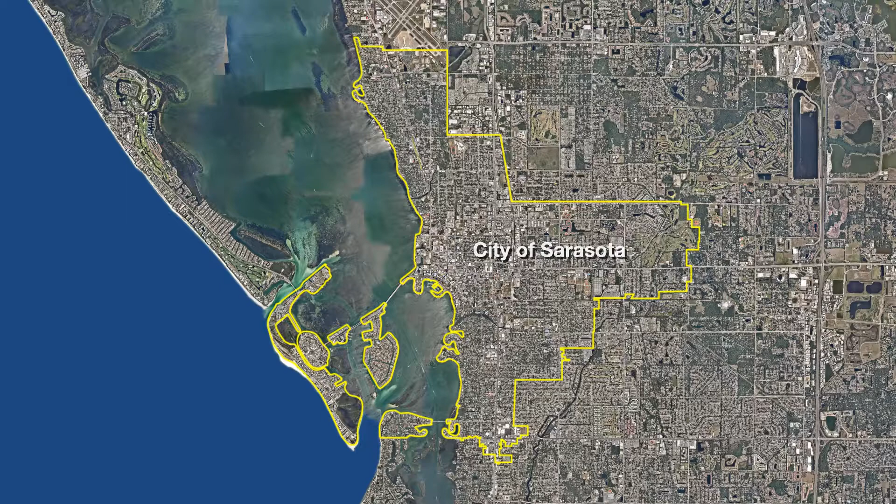Welcome to the public information meeting for the US 41 at Dr. Martin Luther King Jr. Way and Myrtle Street intersections Project Development and Environment, or PD&E, study. The Florida Department of Transportation, District 1, in cooperation with the FDOT Office of Environmental Management, the Sarasota Manatee Metropolitan Planning Organization, the City of Sarasota, and Sarasota County is holding this meeting to provide you with information and to obtain your comments about the proposed intersection improvements to and between the intersections of US 41 at Dr. Martin Luther King Jr. Way and Myrtle Street. The length of the project is approximately half a mile.

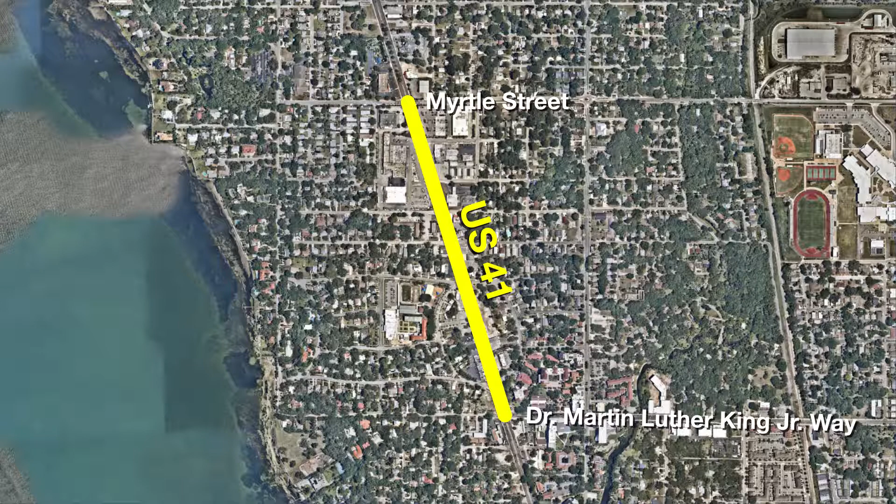The environmental review, consultation, and other actions required by applicable federal environmental laws for this project are being or have been carried out by the FDOT pursuant to 23 U.S.C. subsection 327 and a Memorandum of Understanding dated December 14, 2016, executed by the Federal Highway Administration and FDOT.

The objective of this PD&E study is to evaluate and document the engineering and environmental issues associated with the proposed improvements along US 41 and at the intersections of Dr. Martin Luther King Jr. Way and Myrtle Street, and then select a recommended alternative based upon that analysis. The purpose of this project is to enhance safety, non-motorized connectivity and access, as well as vehicular traffic flow and operations between residences and schools of the northern downtown Sarasota area and the Bayfront area.

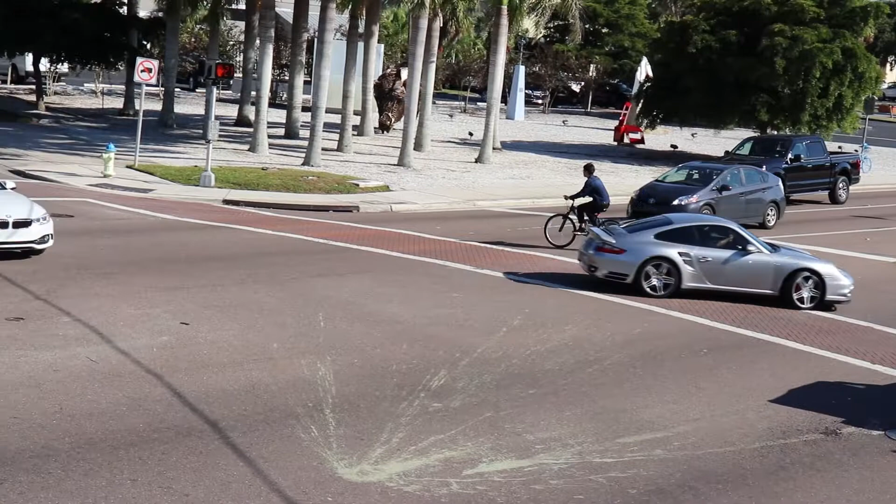The proposed improvements are similar to improvements that have been identified at other intersections along US 41 that are intended to improve traffic flow and enhance safety. The US 41 intersection improvements have been identified in the 2030 Sarasota City Plan, also known as the Comprehensive Plan. It is also included as part of the Sarasota Manatee 2040 Long-Range Transportation Plan and Transportation Improvement Program.

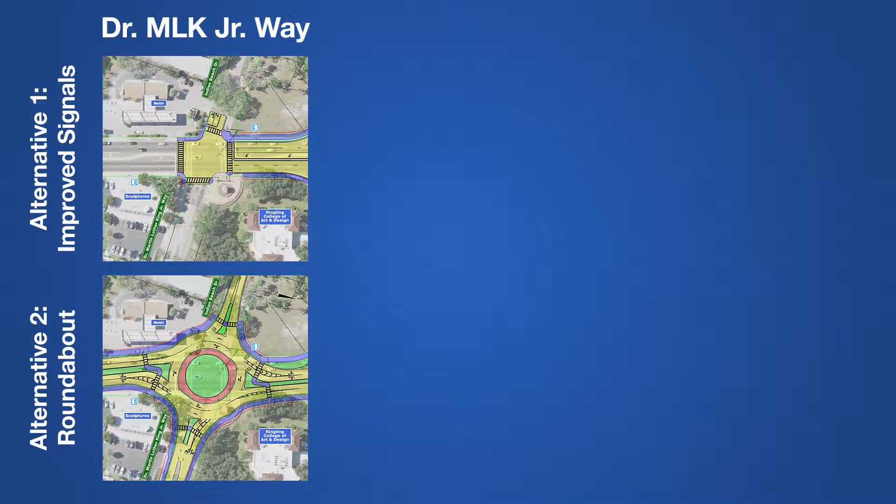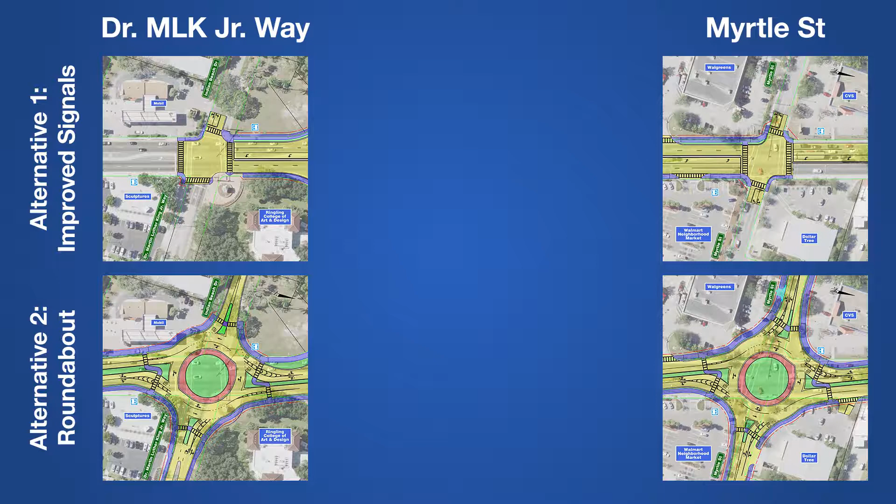The department is considering two build alternatives for the US 41 at Dr. Martin Luther King Jr. Way intersection and the US 41 at Myrtle Street intersection. Alternative 1 proposes to improve both existing signalized intersections, and Alternative 2 proposes to construct partial two-lane roundabouts at both intersections. Each alternative has the option to include buffered bicycle lanes between the intersections, Alternatives 1A and 2A, or not include buffered bicycle lanes between the intersections, Alternatives 1B and 2B.

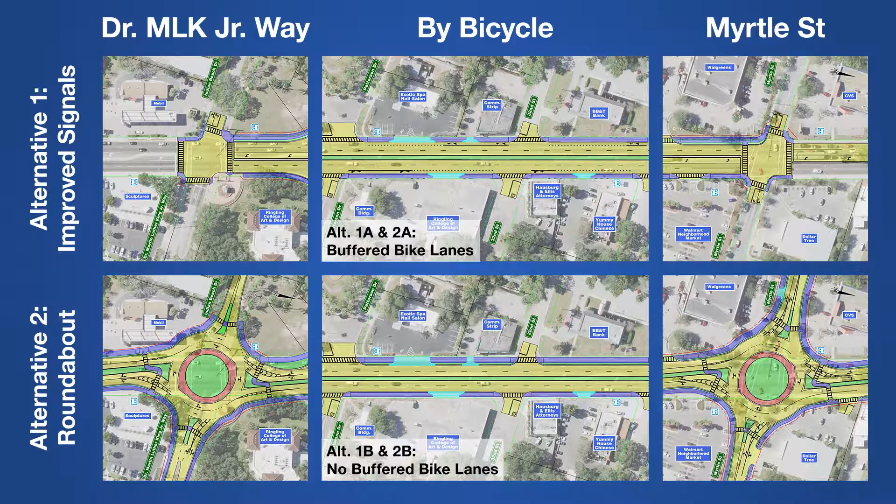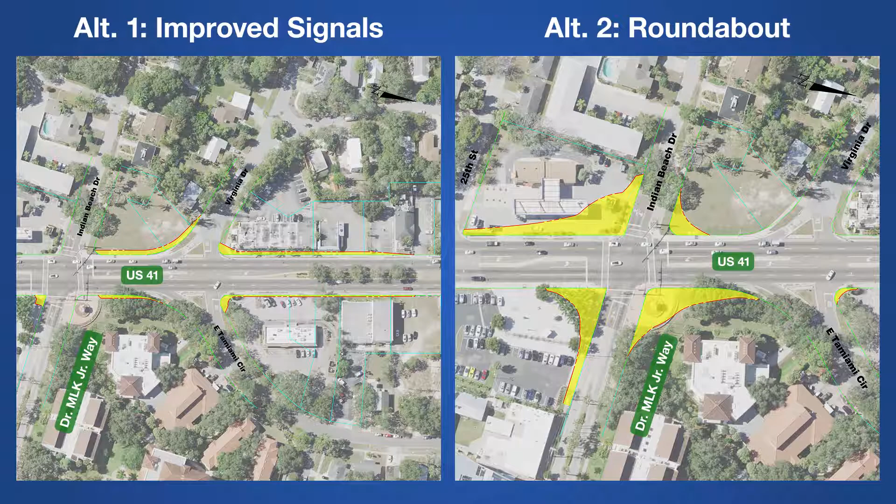Each alternative proposes a continuous closed median from Dr. Martin Luther King Jr. Way to Myrtle Street. All the alternatives mostly fit within the existing right-of-way between the two intersections. The improved signalized intersections require additional right-of-way approaching each intersection to accommodate a left turn lane adjacent to a traffic separator. The roundabout alternatives require right-of-way at each quadrant of the intersections.

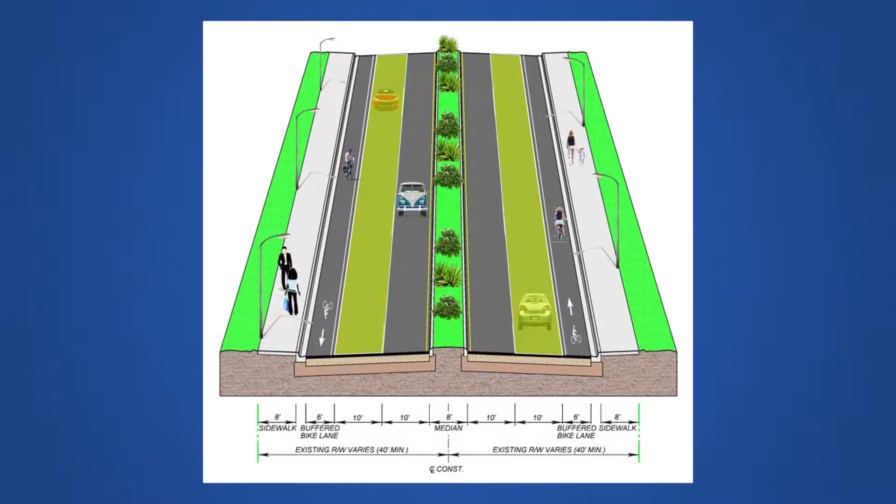The typical section with buffered bicycle lanes between the intersections for Alternatives 1A and 2A includes an 8-foot continuous landscaped median with two 10-foot travel lanes on each side, followed by a 6-foot buffered bicycle lane, a 2-foot curb and gutter, and an 8-foot concrete sidewalk adjacent to the curb.

The typical section with no buffered bicycle lanes between the intersections for Alternatives 1B and 2B includes an 8-foot continuous landscaped median with one 10-foot travel lane on each side, followed by an 11-foot travel lane and a 2-foot curb and gutter.

The west side of US 41 will include 4 feet of separation from the curb, followed by a 10-foot concrete sidewalk, 1 foot flat, and grading to the existing ground. The east side of US 41 will have an 8-foot sidewalk adjacent to the curb, 1 foot flat, and grading to the existing ground.

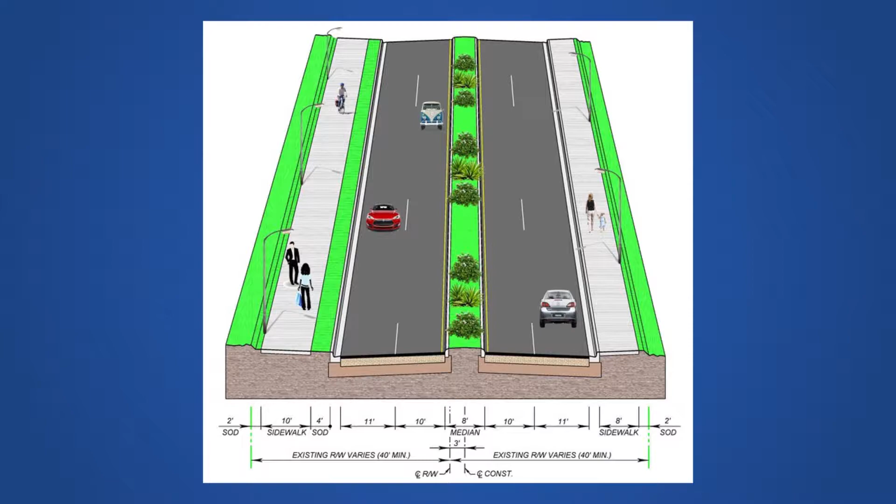The department has developed a traffic simulation model of the improved signalized corridor alternative under traffic conditions expected for the year 2040.

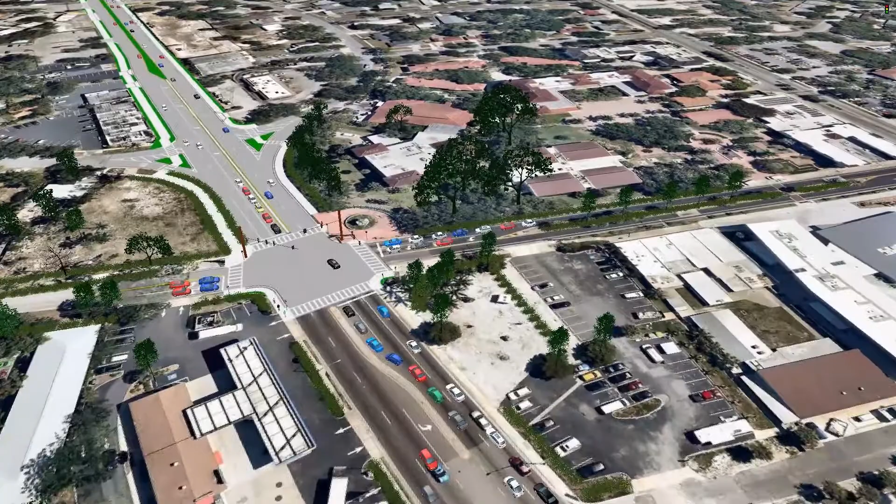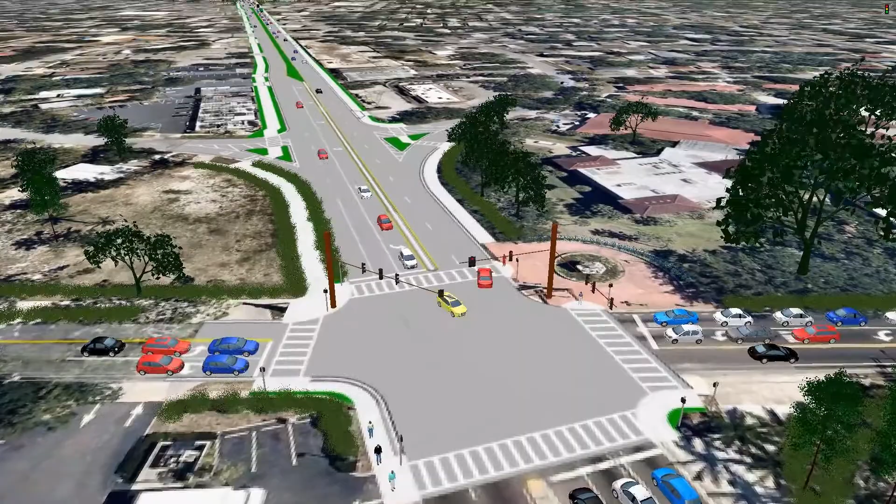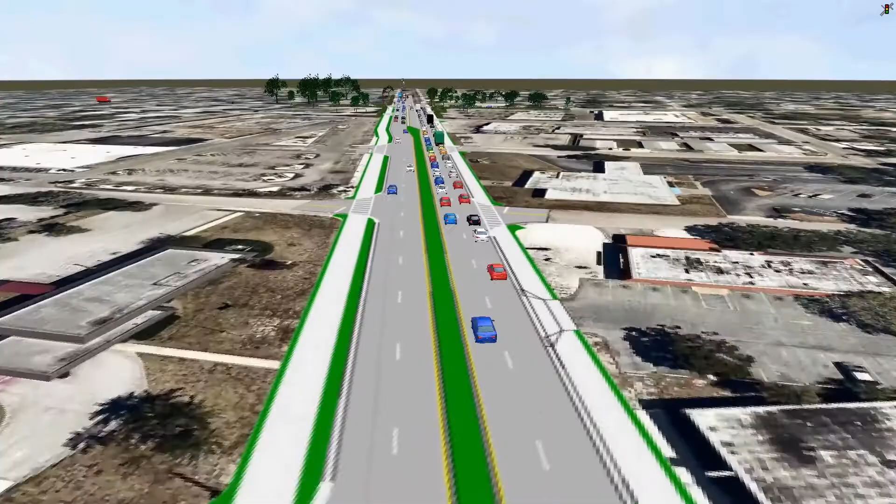For the improved signalized intersection alternatives 1A and 1B, the lane configurations would remain the same. The signal timings would be modified. The median opening between the two signalized intersections would be closed, and the turn lanes on US 41 would be lengthened. Closing the median openings between the two intersections will simplify traffic operations and greatly reduce the number of left turn and angle crashes, which totaled 33 in a recent 5-year period.

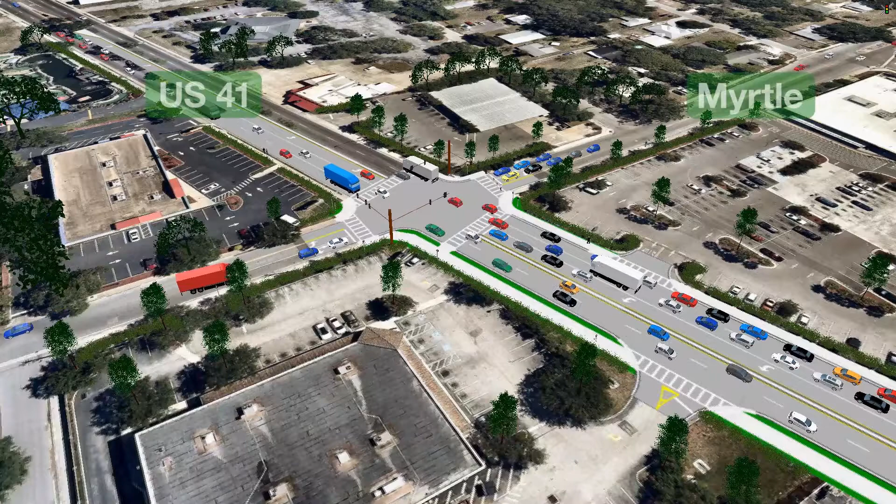The department also developed a traffic simulation model of the improved roundabout corridor alternative under traffic conditions expected for the year 2040. For the roundabout alternatives 2A and 2B, the existing signalized intersections would be replaced with partial 2-lane roundabouts, and the median openings between the two roundabouts would be closed.

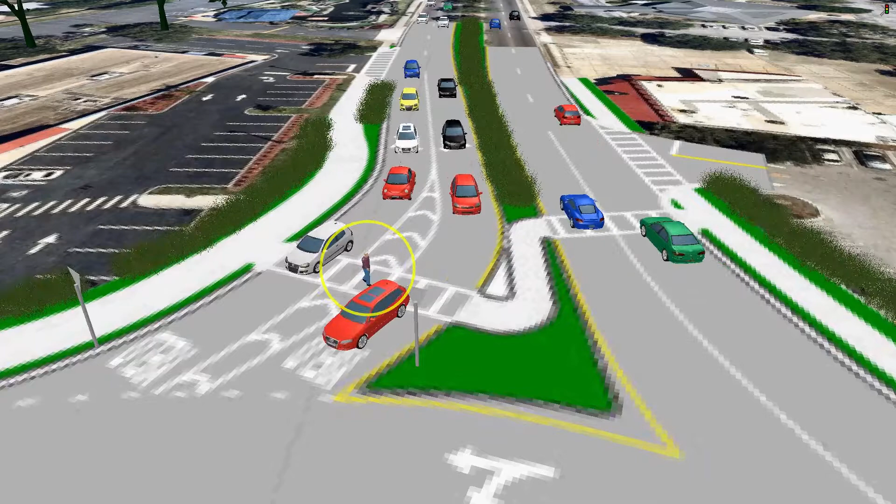Roundabouts are known to reduce speeds along a corridor and improve pedestrian accommodations. Even though speeds are reduced, roundabouts can still process more vehicles through an intersection due to the continuous flow of traffic. This results in reduced delay for all motorists and less congestion at the intersection.

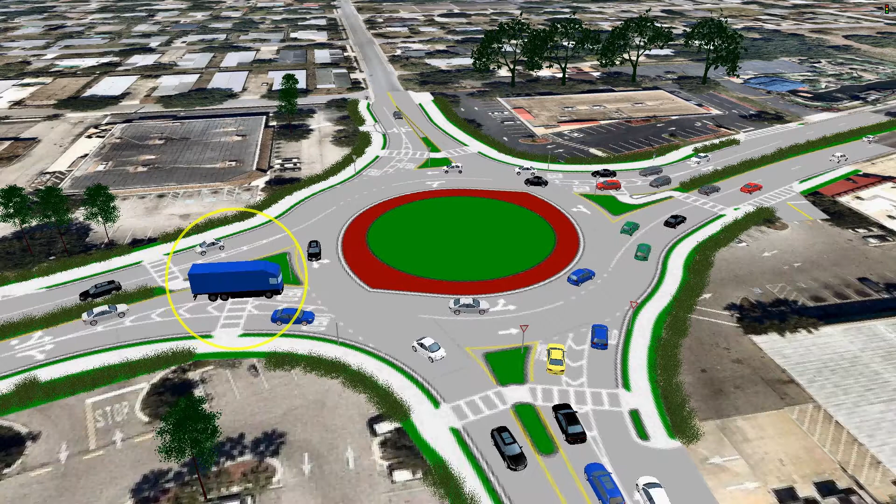The roundabouts developed for the intersections of US 41 at Dr. Martin Luther King Jr. Way and US 41 at Myrtle Street can also accommodate large trucks. A truck apron will also be provided to give extra space for larger vehicles.

A comparison of the signal build alternative versus the roundabout build alternative shows the vehicular delays are similar in the AM and PM peak hours. At both intersections, delays at the side street approaches with a roundabout are significantly reduced. In addition, both intersections with roundabouts will experience reduced vehicular delays in the off-peak hours when traffic volumes are less.

From a safety perspective, the roundabout corridor alternative will greatly reduce the number of fatalities, severe and/or minor injuries, because any crashes likely to occur will happen at lower speeds and at reduced angles.

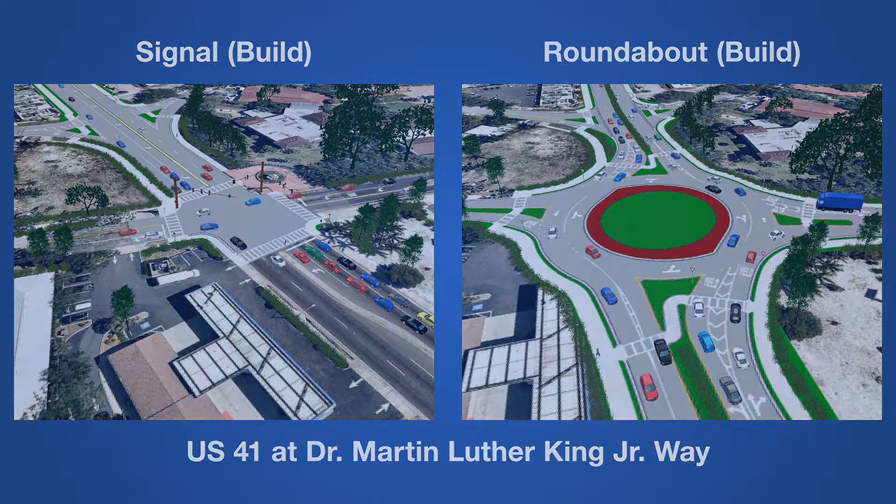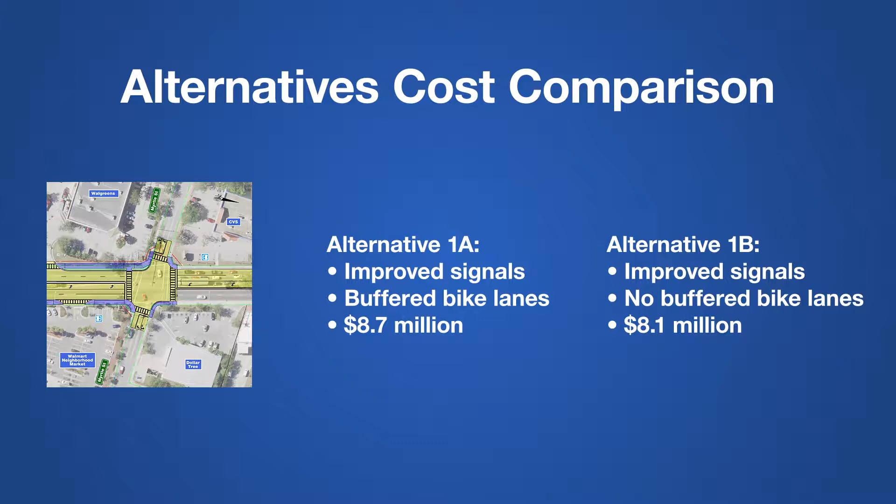The total cost, including right-of-way, of the improved signalized intersections with buffered bicycle lanes is approximately $8.7 million for Alternative 1A. The total cost, including right-of-way, of the improved signalized intersections with no buffered bicycle lanes is approximately $8.1 million for Alternative 1B. The total cost, including right-of-way, of the roundabout intersections with buffered bicycle lanes is approximately $12.7 million for Alternative 2A. The total cost, including right-of-way, of the roundabout intersections with no buffered bicycle lanes is approximately $13.2 million for Alternative 2B.

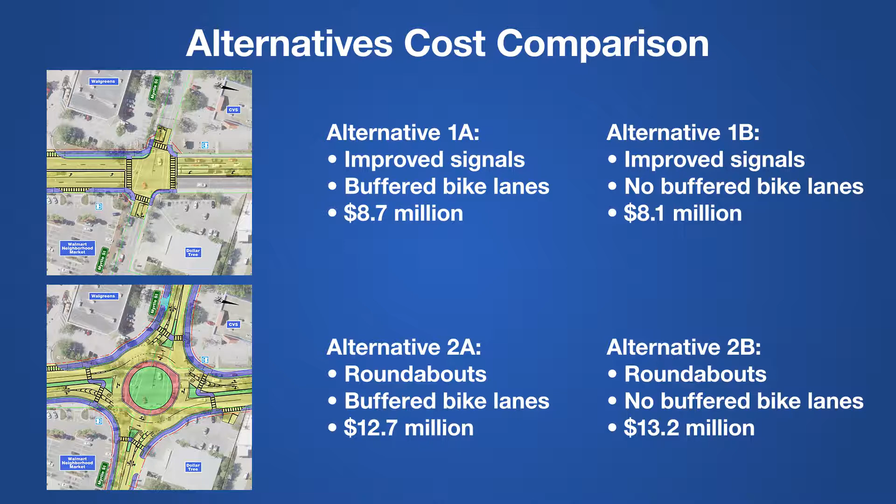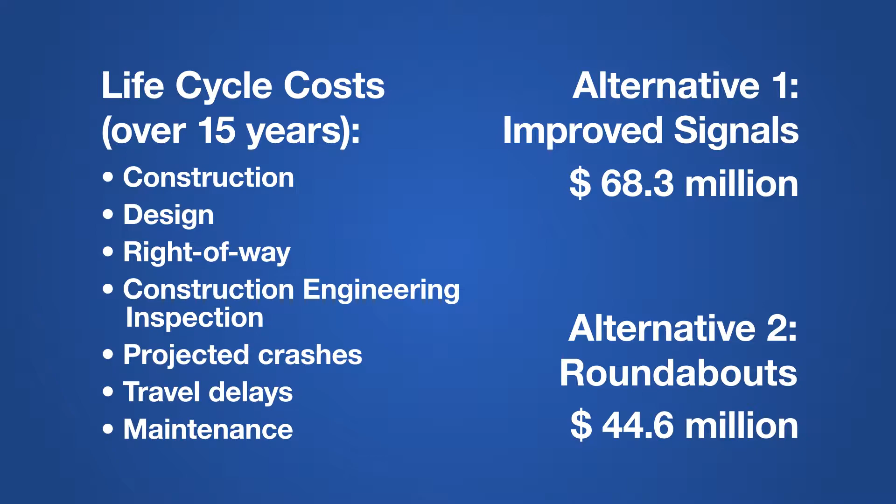Life cycle cost evaluations compare the total project costs for the design life of 15 years. These costs include construction, design, right-of-way, and construction engineering inspection, projected crashes, project travel delays, and project maintenance. The average total life cycle cost for Alternative 1 improved signals is $68.3 million compared to an average cost of $44.6 million for Alternative 2 roundabouts.

Another valid alternative being considered is the no-build alternative. This alternative assumes that no improvements will be provided along US 41 from Dr. Martin Luther King Jr. Way to Myrtle Street through the year 2040, except for routine maintenance.

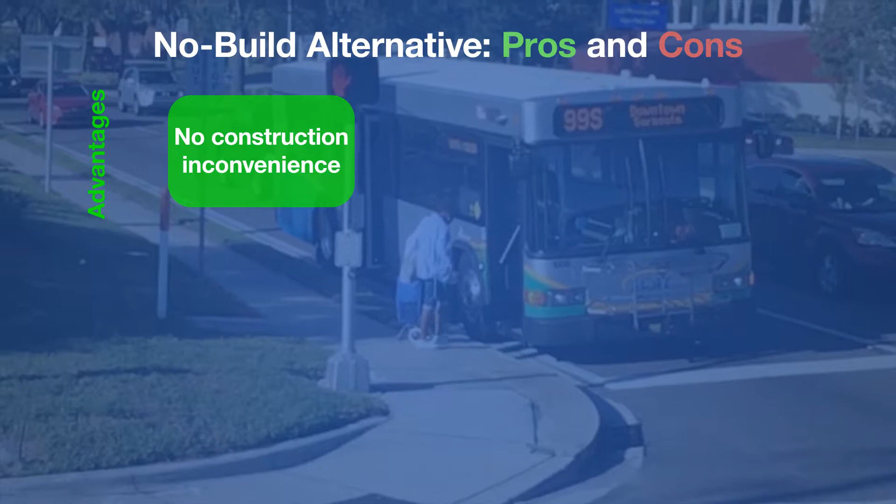There are advantages and disadvantages associated with the no-build alternative. The advantages include no inconvenience to traffic flow due to construction operations, no right-of-way acquisition, design, or construction costs, and no direct impacts to the adjacent natural and human environment.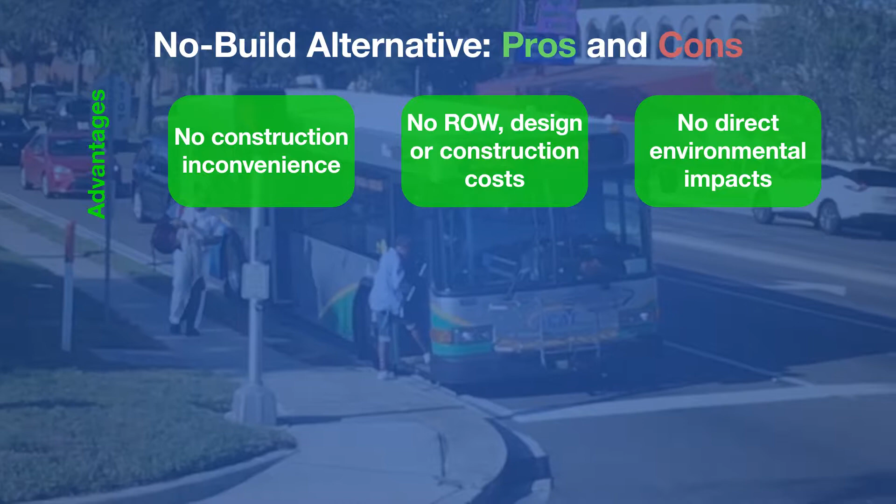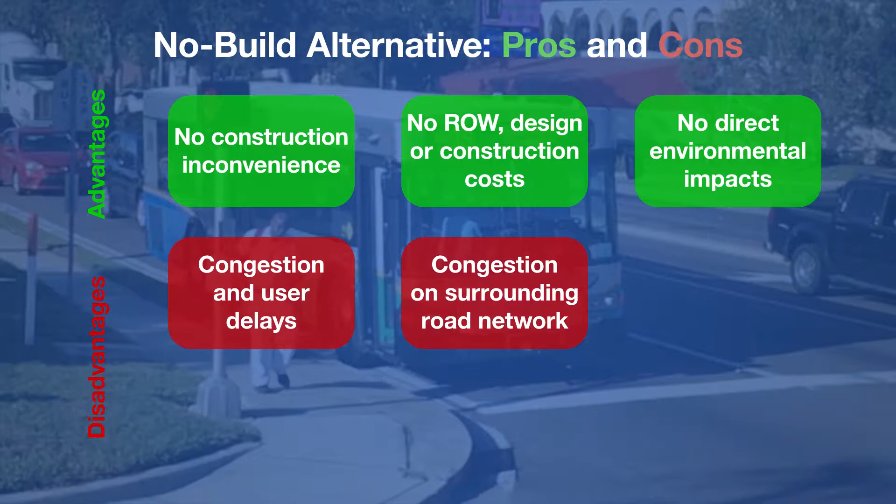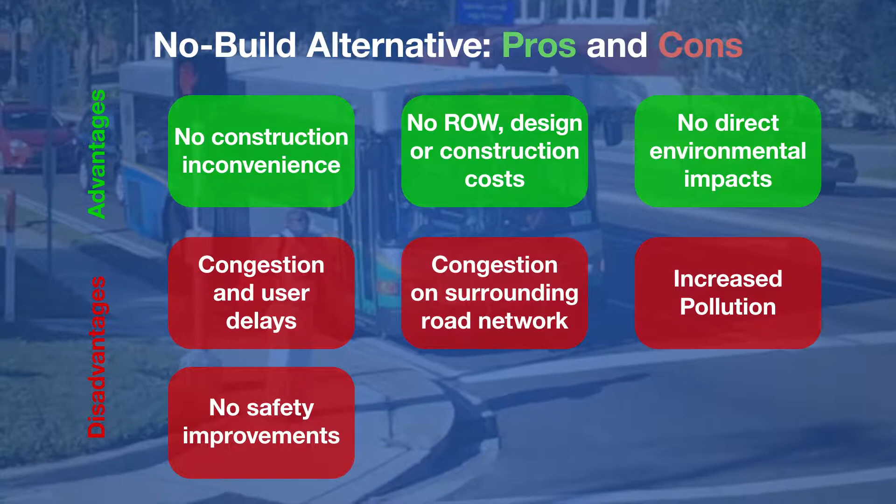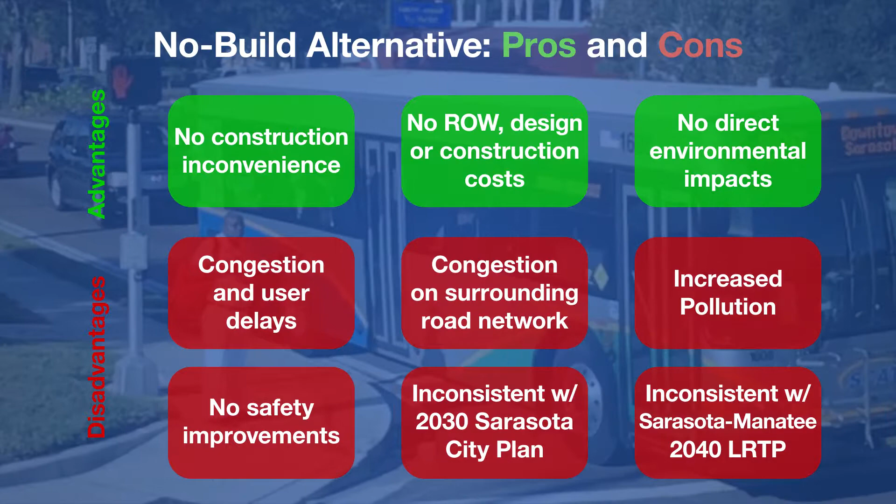The disadvantages of the no-build alternative include an increase in traffic congestion and user delays, increased traffic congestion on the surrounding roadway network, an increase in air pollutants due to traffic congestion, no improvement in safety conditions for bicyclists and pedestrians utilizing the US 41 corridor from Dr. Martin Luther King Jr. Way to Myrtle Street, not consistent with the 2030 Sarasota City Plan, and not consistent with the Sarasota-Manatee Metropolitan Planning Organization's 2040 Long Range Transportation Plan and Transportation Improvement Program.

The total life cycle cost for the no-build alternative is $58.7 million.

An important component of this study is the comparative evaluation of the environmental effects associated with each alternative. The evaluation is being conducted in accordance with the National Environmental Policy Act of 1969 as amended and other federal requirements. It includes the consideration of the project's effect on the social, cultural, natural, and physical environments.

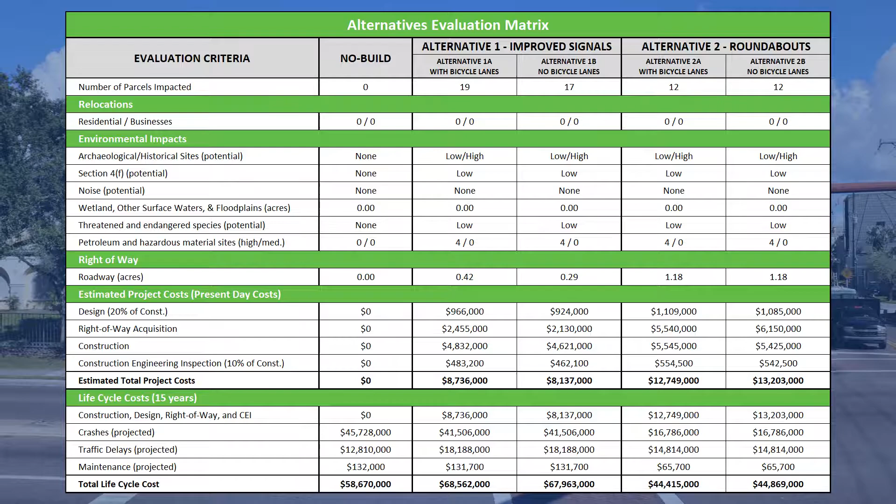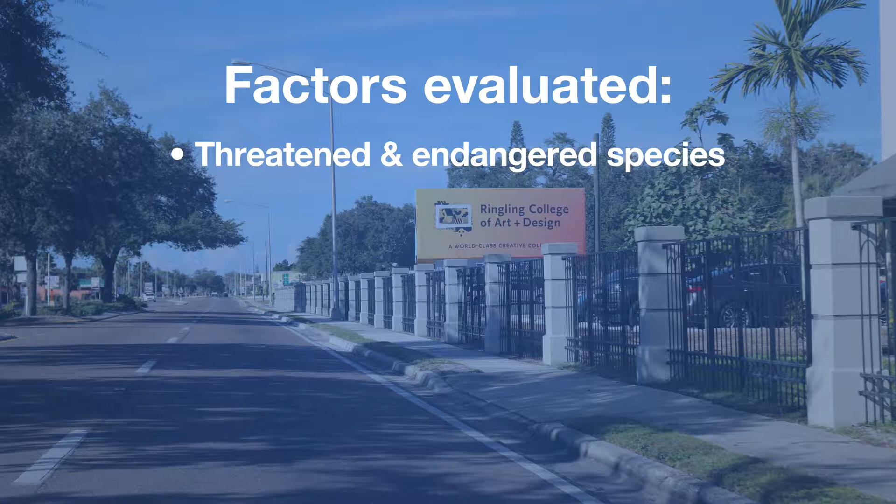The major criteria upon which each of the proposed alternatives and the no-build alternative are being evaluated are presented in a comparative matrix that is contained in the project handout and displayed this evening. Among the factors evaluated in the study are threatened and endangered species and their habitat, wetlands and floodplains, recreational lands, cultural resources, social impacts, effects to the human environment such as air, noise, and aesthetics, and project costs.

The measure of these effects, as well as comments received from the public, local governments, and review agencies, will help the department select the recommended alternative.

Over the next few months, the alternatives will continue to be refined and evaluated to develop the recommended alternative. During a formal public hearing, tentatively scheduled for the summer of 2019, FDOT will present the recommended alternative and the no-build alternative to the public for review and comments.

The PD&E study will be complete when location and design concept acceptance is granted from FDOT's Office of Environmental Management following the public hearing. Currently, the design of the improvements for US 41 at Dr. Martin Luther King Jr. Way and Myrtle Street intersections is funded in fiscal year 2020 in the department's adopted 5-year work program. Right-of-way acquisition and construction are not funded at this time.

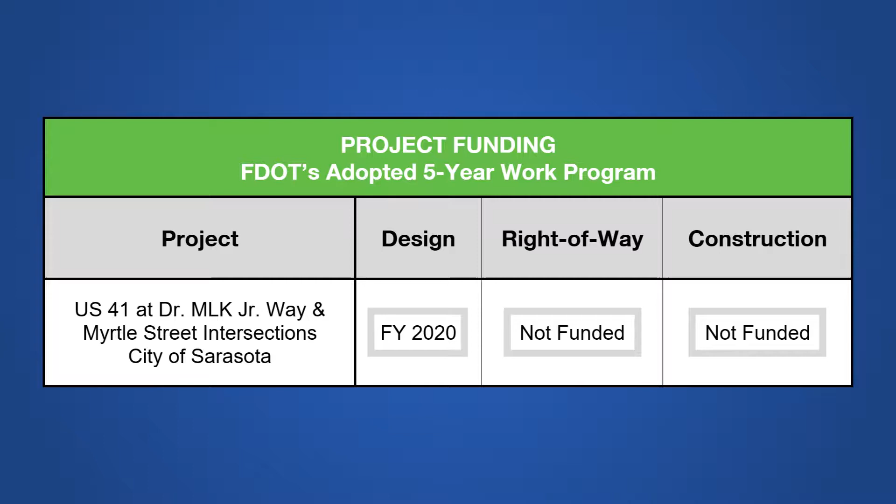This meeting is one of your opportunities to provide comments on the study and each of the proposed alternatives. Your comments are a very important part of the decision-making process.